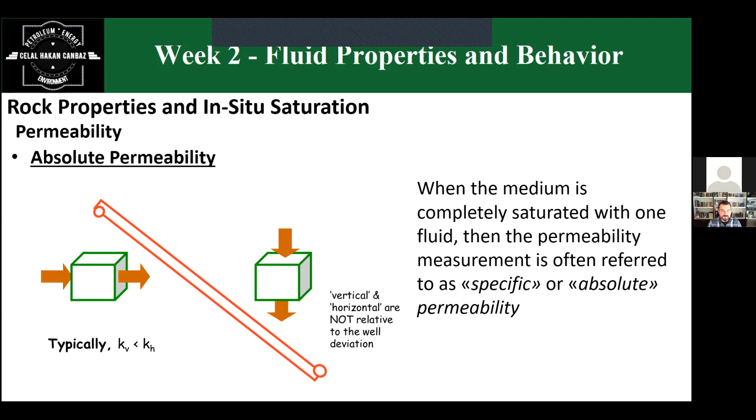Now, fluid saturation. The saturation of the fluid is the fraction of the pore volume occupied by that fluid—the volume of the fluid divided by the pore volume. So out of the total pore volume, what percentage, as a fraction, is occupied by that fluid? To know this, you have to use the saturation value.

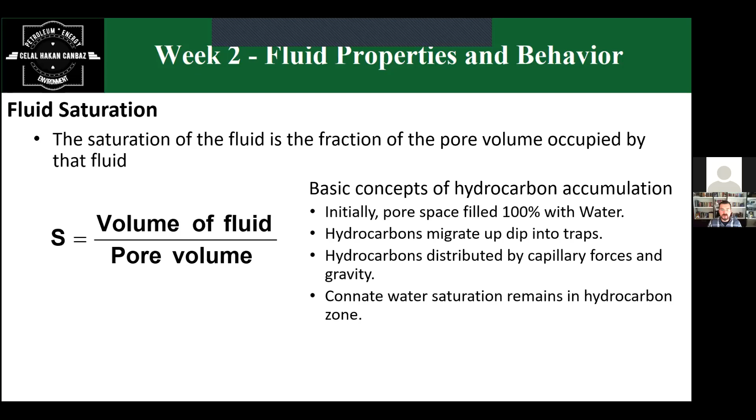How do we determine these fluid saturations? We use core analysis, as I mentioned—one of the main sources. With in situ taken samples, it will be much healthier, with lower uncertainty, and you can get the results. Capillary pressure measurements can also be performed, and of course logs are another choice for estimating this. Electric open hole logs are used for that.

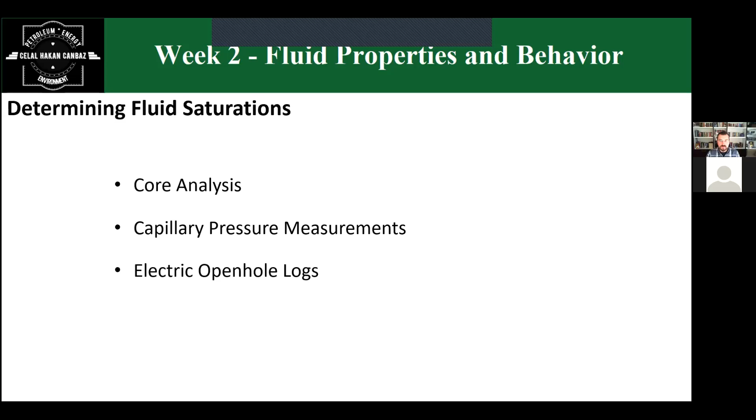For the relative permeability term, before describing relative permeability, we have to describe effective permeability. If the rock pore spaces contain more than one fluid—instead of one fluid, you have two or three fluids, gas, water, oil—

then the permeability to a particular fluid is called effective permeability—the measure of the fluid conductance capacity of a porous medium to a particular fluid when the medium is saturated with more than one fluid.

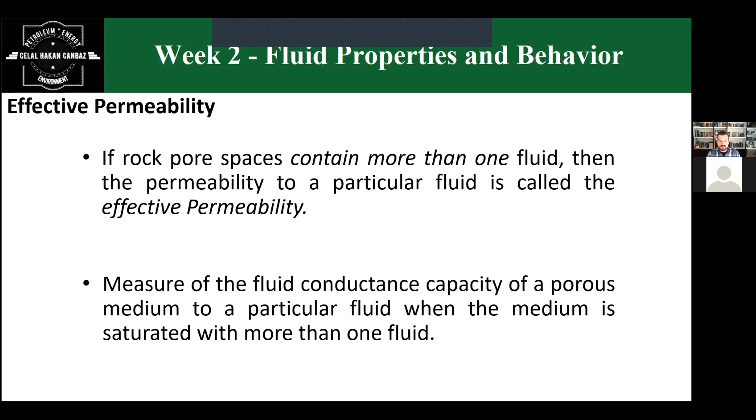When the medium is completely saturated with one fluid, then the permeability measurement is often referred to as specific or absolute permeability.

So what about relative permeability? It is defined as the ratio of the effective permeability to a fluid at a given saturation to the effective permeability to that fluid at 100% saturation level. In other terms, for oil, gas and water, the relative permeabilities are the effective permeabilities divided by the permeability value. So when we put these on a plot, the relative permeability plot—

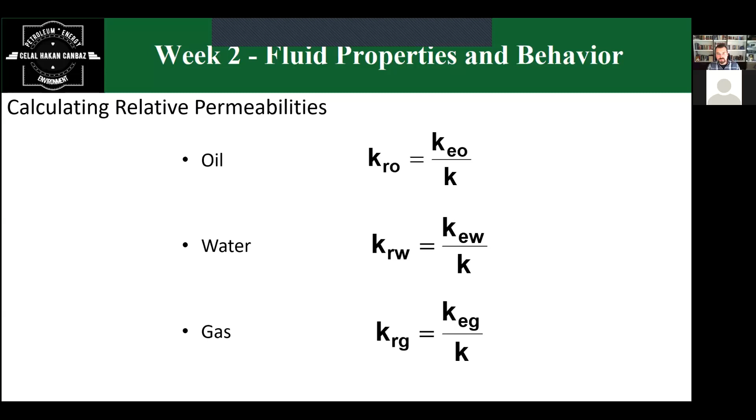here we can say that if we have one fluid in the medium, the permeability has to reach your Kr, relative permeability, to 1. In core analysis, this can be done—not exactly 1, but 0.99 can be reachable.

If oil is moving through rock with irreducible water saturation, then your permeability maximum can reach to about 0.8 or 0.78. If water is moving through rock with irreducible oil saturation, then your water saturation level will be somewhere here. This is a scenario where both oil and water are present, and if the phase is more than one, your permeability seems reduced.

This plot is also used to describe the wettability—we will talk about this one later.

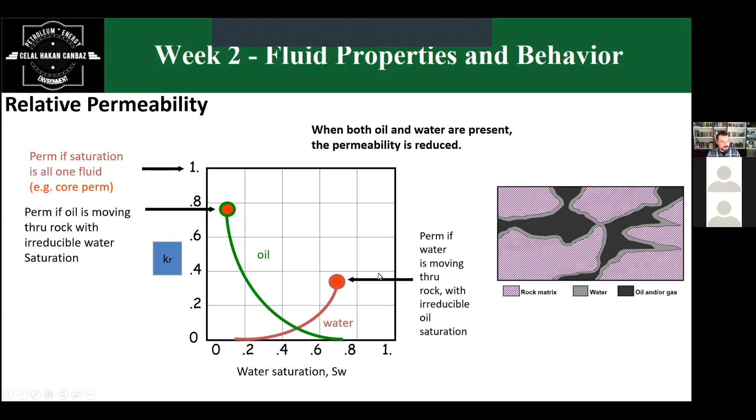Depending on the saturation, the permeability to oil and to water are each lower than 1. Thus, the effect of having both fluids present is to lower the permeability, even the sum of the two is not unity. So when a well starts producing water instead of just oil, if you start to produce water as well, your liquid production is likely to be reduced. So phase change, adding another phase, totally has an effect on your values of permeability.

So what about wettability? These terms are strongly dependent on each other. Wettability can be described as a tendency of a fluid to spread on a surface when that fluid and the surface also are in contact with another immiscible fluid. Two fluids are not miscible with each other; they both have to be in contact with your rock surface to have a comparison. The second fluid can be air, a gas phase, but mostly we are using it for oil and water.

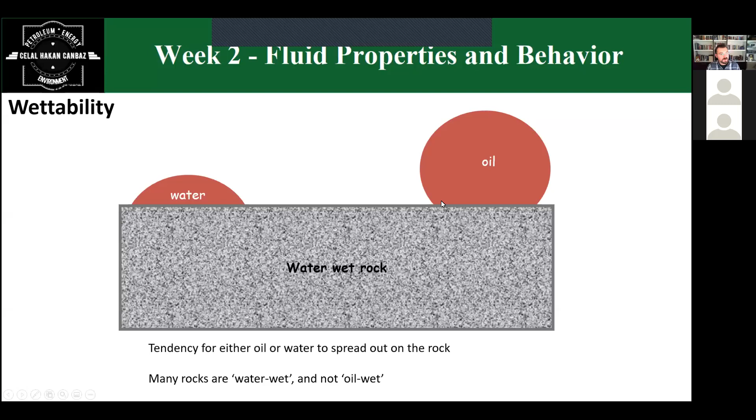You can perform some wettability analysis like goniometric measurements, or some core analysis like USBM and Amott method. And there is another alternative method that we developed also at Istanbul Technical University, continued in Abu Dhabi at the Petroleum Institute - we developed this alternative method called the rising core method. It gives you also an idea regarding your rock behavior with the existing oil and water phase.

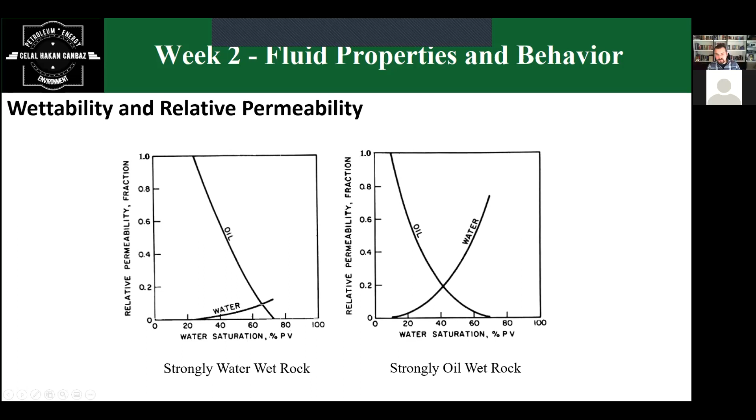So the capillary pressure - let's describe the capillary pressure as well. Here you have a capillary tube, with your liquid phase and your gas phase - let's say liquid phase and gas phase, or oil and water. Here is oil and water. Say your water phase makes an angle like this, we call this theta.

It has a radius, it has a height of your column - that's one way of description. The second way of description: your interfacial tension of your water and oil phase, and your cos theta divided by R, your radius. This gives you the capillary pressure.

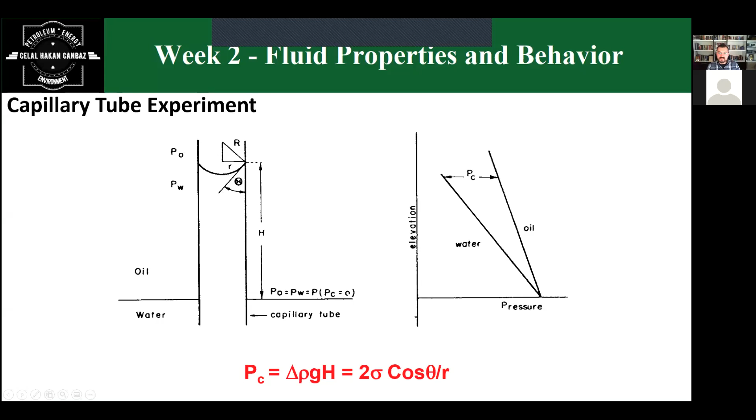Let's describe this to make it a little bit more understandable. For example, if you place a capillary tube into a dish of water, the water will climb up the tube some distance. The force which causes this to happen is capillary force. At the top of the fluid column, the shape of the fluid is cupped, indicating that the air pressure is higher than the water pressure. So in the previous example, oil pressure is higher than the water pressure. The difference in the air and water pressure at the curved interface is called the capillary pressure.

If capillary tubes of different diameters are placed into the dish, the water will climb the highest in the smaller tube, and the curvature will be greatest, and the capillary pressure will be highest as well.

So in a rock, when we talk about a rock surface in contact with two fluids, it is originally saturated with water. As oil begins to rise upwards, at the interface of oil and water in the pore space, the oil pressure is higher than the water pressure by the capillary pressure.

If this oil-water interface is high above the free water level that we talked about last week, which is the level of water in the dish, the capillary pressure will be higher. So what does this mean? This means oil moves more easily than water through a water-wet rock, since it follows the big pores and permeable paths.

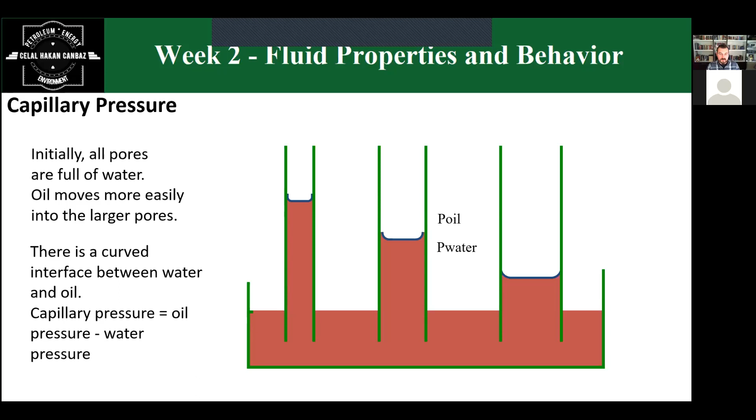Another term, the capillary pressure, is the non-wetting phase pressure minus the pressure in the wetting phase. The pressure difference between the non-wetting phase and the wetting phase.

So it's described by the Young-Laplace equation, and here you can see the liquid surface tension. We are assuming here it's not oil, but liquid with air contact. Your capillary pressure term is here, and your radius, R1 and R2, are the principal radii of curvature on the interface. The difference of these R's gives you the capillary pressure term.

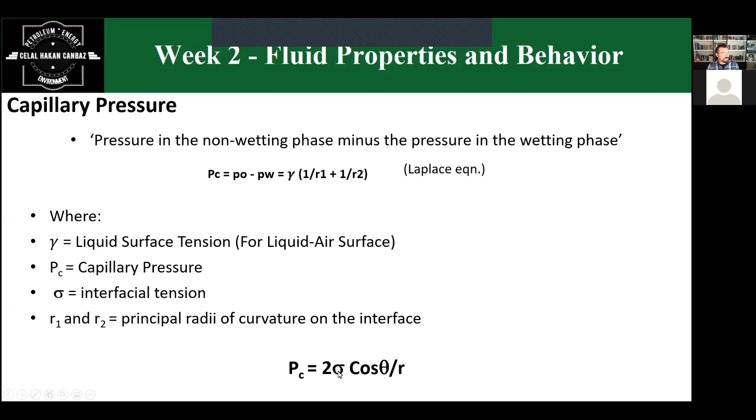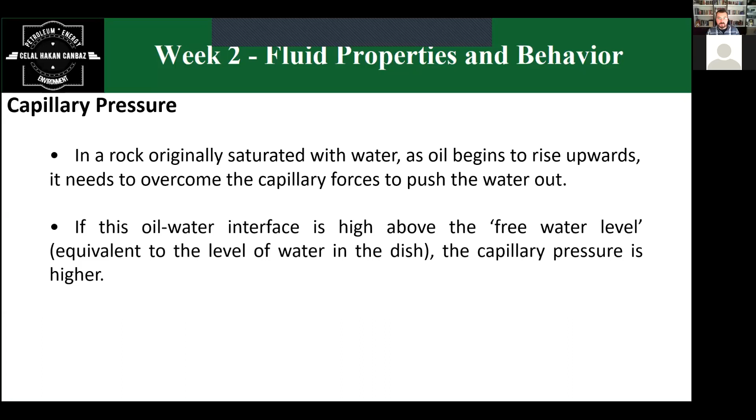So we tried to describe the main terms, and now let's go to the 5 fluid types and fluid behaviors. What are these fluids that we are dealing with in reservoir and wellbore, in production, in the oil and gas industry? So we have black oil first of all, the easiest part actually. We have certain correlations to describe black oils, and things are easy for black oils.

Black oil, volatile oil, actually we can say retrograde gas, we can say wet gas and dry gas from oil content. If we put it in order from oil content, we can say black oil, volatile oil, retrograde gas, wet gas, and dry gas.

So let's start with the assumption that we have a single hydrocarbon compound. If I have a single hydrocarbon compound, my phase envelope will be like in this figure. So your vapor pressure curve will be a line up to your critical point, and the upper part, above this point, will be liquid totally.

Then following the critical point at a certain temperature, when the temperature increases, it will be gas phase directly, and the part below this vapor pressure curve will also be described as gas phase. This is a single hydrocarbon compound, let's say methane, for example. But in nature, it's not like this.

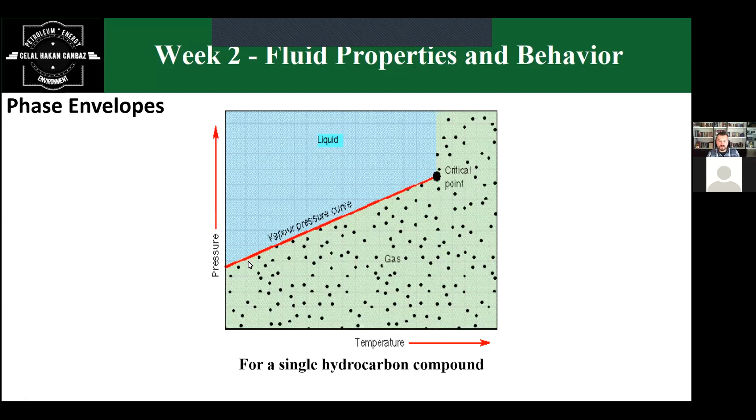So you have a bubble point pressure curve, not a line anymore, it will be a curve, your bubble point pressure curve up to your critical point. And then following the critical point, your dew point curve starts, because it will pass through gas phase directly. Above this bubble point curve will be described as liquid. Again, at a certain temperature above your critical point, it will be described as gas phase, and following the lower part of your dew point curve will also be described as gas phase.

So inside this phase envelope, your liquid level will increase from 0 through to 100%. And these curves, these liquid percentage curves, also vary according to your hydrocarbon content directly. So in this example, it's a good case, a typical case, but a good case.

The A point here gives you your reservoir pressure and temperature. So the B point, for example, we can describe this as your wellhead pressure and temperature. And C, separator conditions. So what happens here in this scenario?

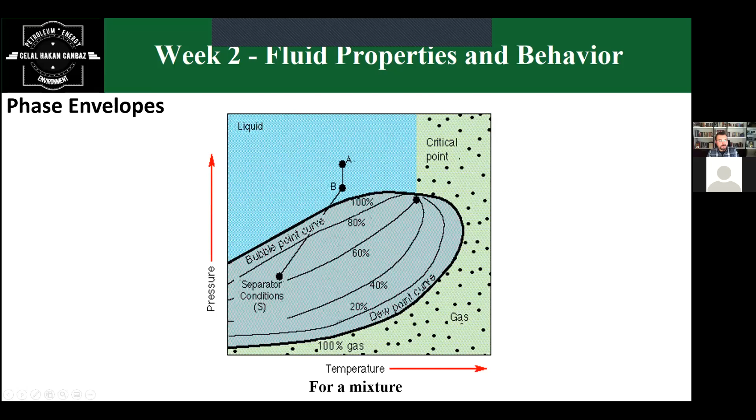So let's describe - yeah, this was the typical phase diagram we set in the previous example. This is similar to that scenario. This is a black oil sample. So in a black oil, you have your bubble point line. In all cases, your reservoir pressure and temperature will indicate one phase flow.

In some conditions, when it reaches the wellhead, you can pass your bubble point line and start to produce with two phase. If you are in two phase, then you will go for reservoir sampling. If you are in one phase, you will go for wellhead sampling directly. Of course, your liquid level will be lower when your pressure is lower.

So because of that, when it comes to the surface, it will be lower and lower. This will be your separator conditions - I think there is a mistake here, this will be your separator conditions, I think it can be somewhere in here. And when it comes from the separator, what happens? It separates your free gas and your oil. You will take it to the stock tank, right?

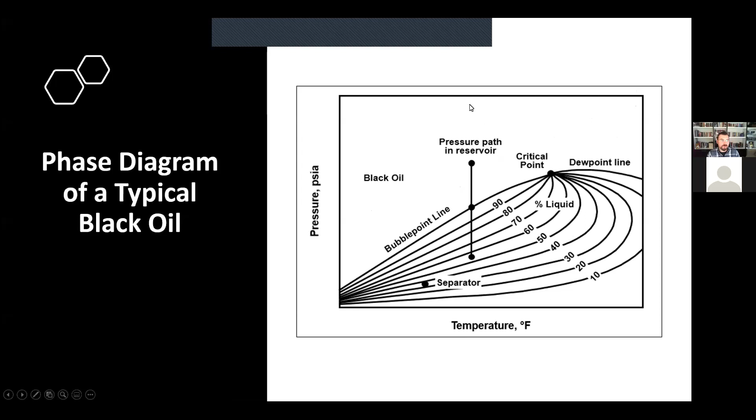Of course, what happens in most cases, when you come to the wellhead from your reservoir - in your reservoir you can be in single phase, but when it comes to the wellhead, it will probably be two phase flow. So you have to consider this one with a few amount of gas, but two phase.

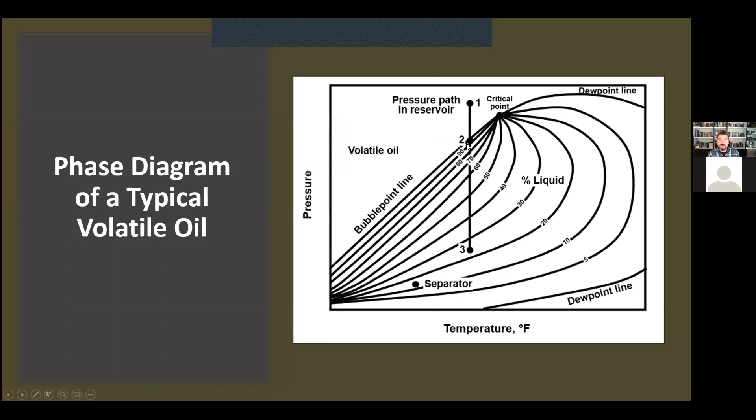So what about wet gas? Wet gas is a condition which is between the dry gas and the retrograde gas.

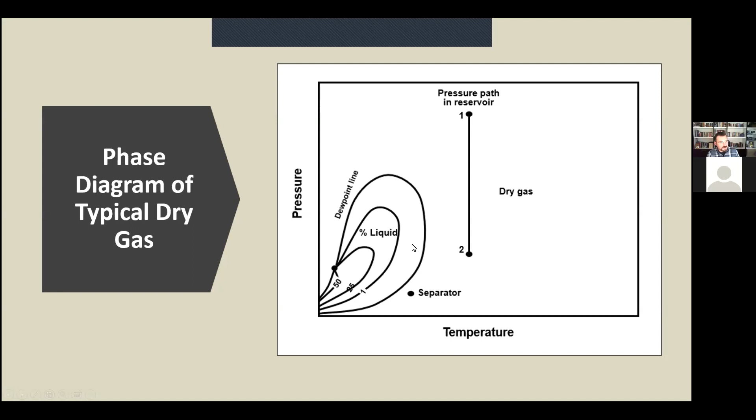So your phase envelope, when you compare it with the dry gas, it was very low. When you compare it with that, it's still low, but compared with dry gas, bigger, right? Bigger diagram you can see.

So you start to see your bubble point line. Your bubble point line is very low in here. Of course, the bubble point line is much more compared with that.

But in most cases, your reservoir pressure and temperature is still in gas phase. And when it comes to the wellhead, you still stay in gas phase, and at separator conditions, you will see some liquids. In wet gas, you will see some liquids in separator conditions, a few amount of liquids, but there will be some liquids, so separation is needed.

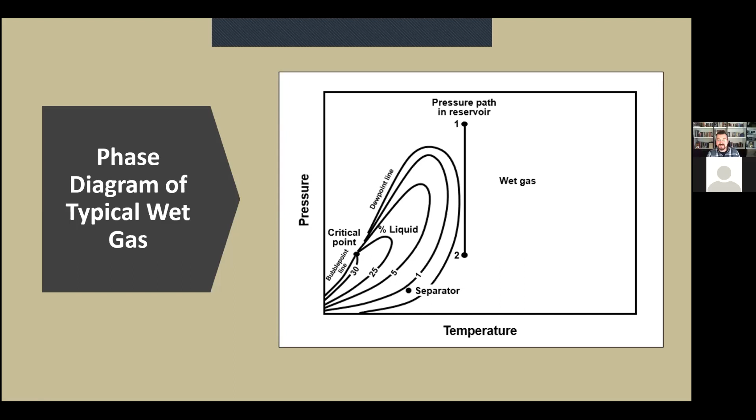You cannot send it directly to storage. So the retrograde is between volatile oil and wet gas. You can understand this from the envelope as well.

So three gases, what are the differences we said? For dry gas, gas at surface is same as gas in reservoir, totally. So where can I take my samples? I can take it from the separator, from the wellhead, doesn't matter, from the reservoir, but cost-wise, what is the best one? Separator. The easiest and the cheapest. You will take it from separator directly, okay?

Wet gas: recombined surface gas and condensate represents gas in the reservoir. Condensate is produced, of course. For the retrograde gas, recombined surface gas and condensate represents the gas in the reservoir, but not the total reservoir fluid. Very few amount of liquid you can see in retrograde gas in the reservoir. When it comes through to your wellhead, your gas phase will be the dominated one, and the liquid will be a very few amount.

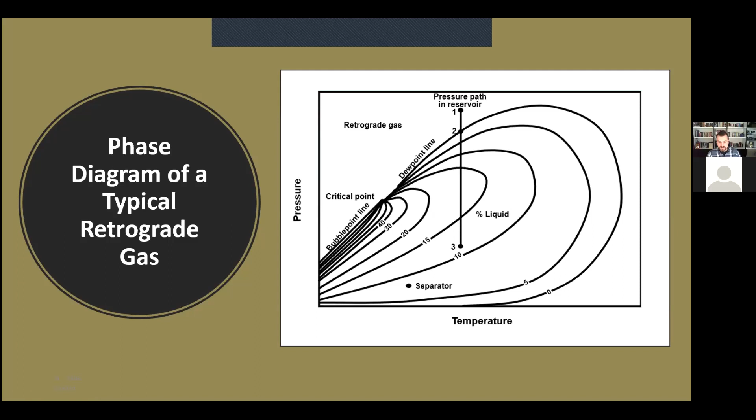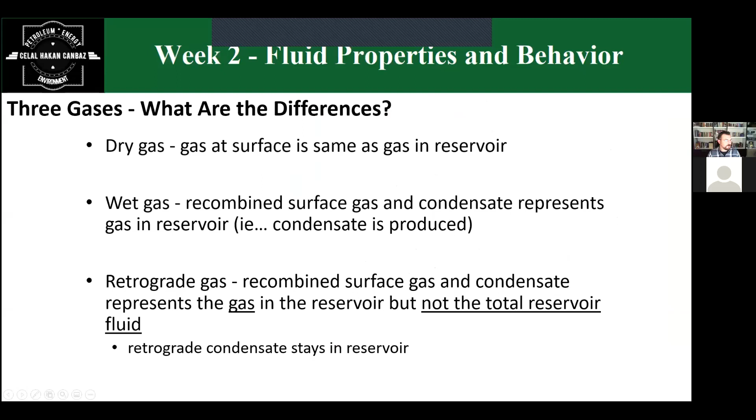I wanted to put this slide as well to see all the 5 reservoir fluids in one picture. So black oil, we said typical behavior. Volatile oil will have more phase envelope. Retrograde gas phase envelope will be lower, but it starts to pass to gas phase. We can see liquid level will be lower.

And when it comes to wet gas, your phase diagram will be smaller, and your bubble point pressure curve will be very low, and in the gas phase it will be much more lower. And of course, the phase diagram is lower compared to wet gas.

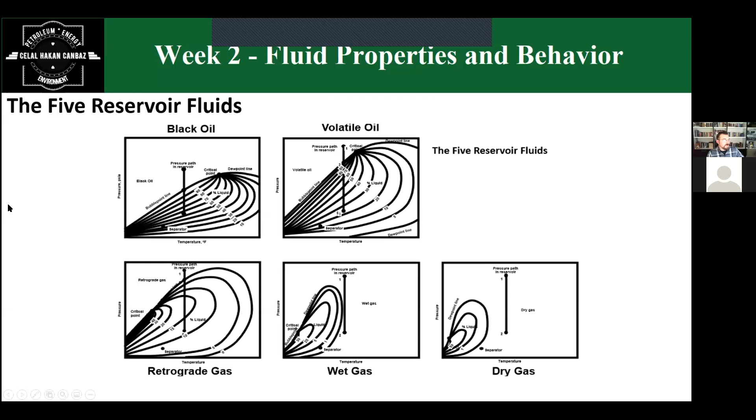So let's make some points regarding field identification. For example, for black oil, volatile, retrograde, wet, and dry gas, for initial producing gas oil ratio (GOR) values, for black oil it will be lower than 1,750.

For example, I was working in a black oil field called Rumaila in Iraq. We were reaching a maximum of 1,500. It's a typical black oil reservoir with around 1,200 wells, all producing similarly.

So all correlations are directly applicable for this type of reservoir, it's the easy one. When it comes to volatile oil, GOR will be between 1,750 to 3,200. If it's more than 3,200, you classify it as retrograde gas. If more than 15,000, wet gas. Dry gas is more than 100,000.

So the liquid gravities: for black oil it will be lower than 45. For volatile oil, higher than 40. Retrograde, higher than 40 again. For wet gas, you can get results up to 70. And in dry gas, you have no liquid, of course.

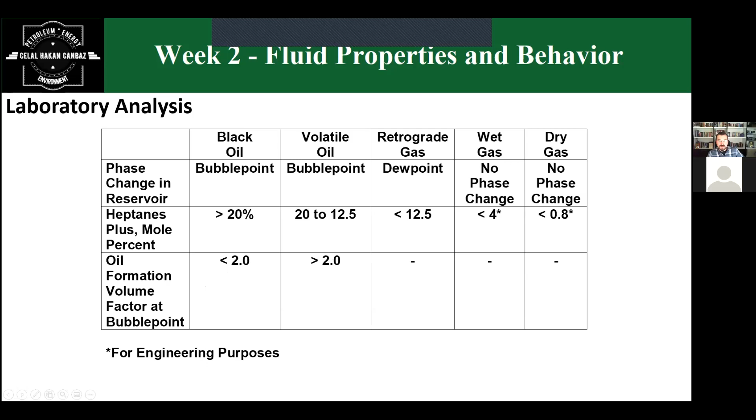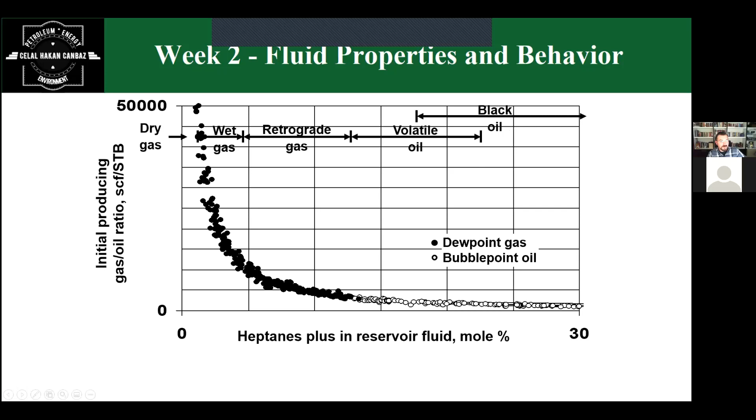So let's talk about the production trends for these 5 fluid types — primary production trends for the GORs and for the API gravities, for 5 different fluid types.

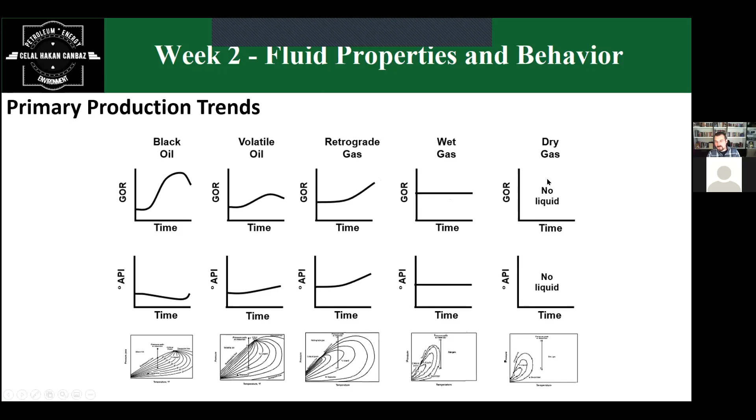For dry gas, you don't have any liquid to compare by time.

So for a single component again, let's talk about the pressure and volume behavior in a PVT cell. I have a single component, I took my sample, put it to laboratory, and now I am comparing the pressure and volume changes at a certain temperature.

If it is in the first one, number one, you are seeing all in liquid phase - we have an oil, all in liquid phase. The pressure starts to decrease by the machine, the piston comes to the backside, and the first gas bubble is seen - we describe this pressure as bubble point pressure.

We continue to lower the pressure using the piston, and it reaches the dew point - this is the last drop of liquid. From this point, there will not be any liquid more. So I continue to move the piston, changing the volume and decreasing the pressure, until I reach the fourth part, where I am totally in gas phase, starting from the third part through to the fourth.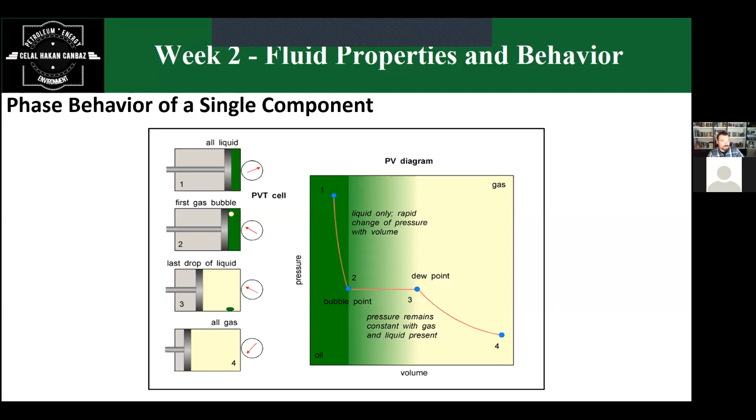I already mentioned the separator conditions - your pressure and temperature decrease. When your pressure and temperature decrease, your point in the wellbore will move to somewhere like this, because both are decreasing. So it will be volatile - volatile will be like this, then retrograde, then wet gas.

Wet gas is very important here because the phase is changing. From gas phase, when it comes to separator conditions, in most cases you are passing to two phase. So if you are producing wet gas, you have to be very careful and use a very good separator - the quality of your separator is crucial.

And when it comes to dry gas, you are already in gas phase, so it's not harmful, there is no problem. You can take your sample anywhere you want - you will choose the most cost-effective one.

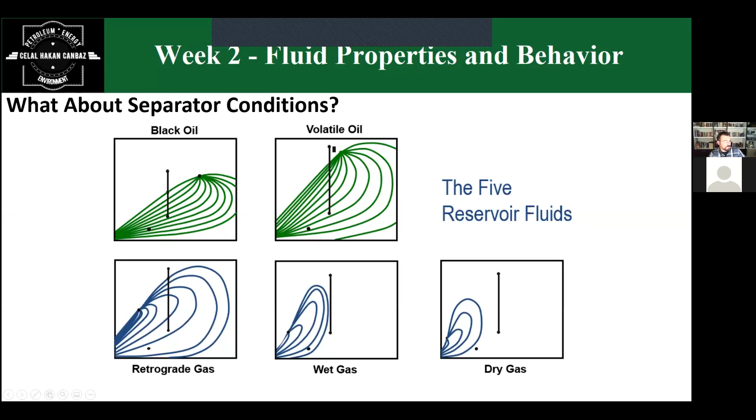Let me open all since we are online now. So, oil change during production - during production there will be a mass losage. The oil phase will lose its mass as gas comes out of solution on its trip to the surface. You start from your reservoir and come to your wellhead, and with the decrease of temperature and pressure, solution gas will expand and pass to gas phase.

When it comes, you reach your wellhead. From your wellhead, when you're going with your pipes through to the separators, again there will be some pressure and temperature change. With this temperature change, some more parts will pass from solution gas inside your oil through to the gas phase directly.

So because of that, next week we will talk about this in multi-phase flow metering. What happens? The industry solved this problem. When you are going from your wellhead through to your separator, it takes some time and some length of pipe. So multi-phase flow meters in line conditions enable you to take samples and measurements without separating these three phases. It's in your line, taking samples directly from your line. We will talk about this next week.

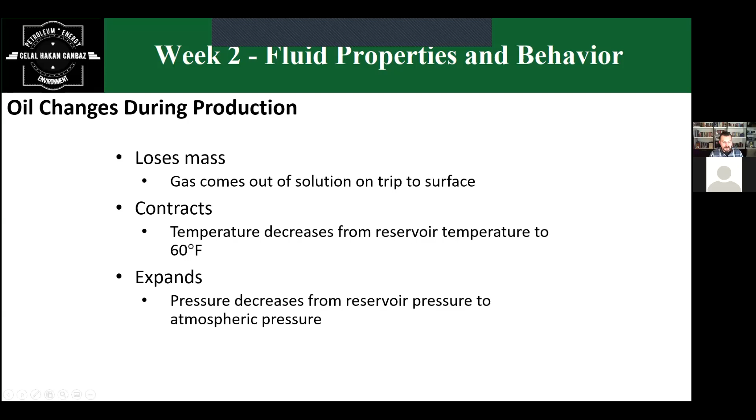So, fluid physical behavior: oil in the absence of gas in solution is called dead oil. The physical properties of dead oil are a function of the API gravity of the oil, pressure, and temperature. The API gravity of oil is defined as 141.5 divided by specific gravity at 60 Fahrenheit.

I saw some field engineers taking this in separator conditions, not stock tank conditions. This is actually one of the crucial points. Minus 131.5 - it's very clear, very easy.

API gravity classification - with gas in solution, oil properties also depend on gas solubility. Gas solubility is normally represented by RS. If you see RS, it means the gas which was inside your oil at a certain pressure and temperature comes out from the oil phase as gas phase.

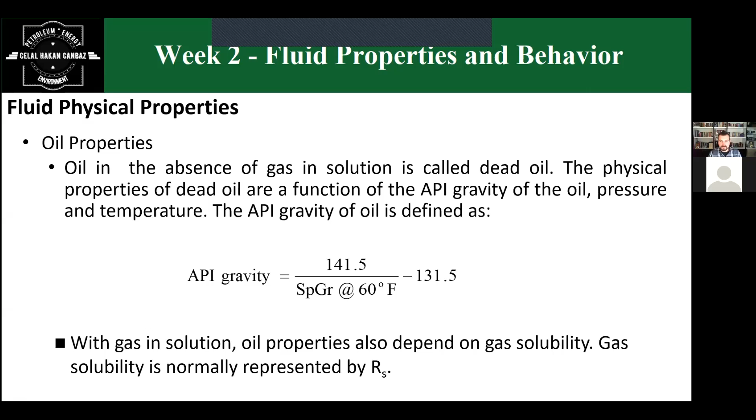So the gas solubility is defined as the volume of gas dissolved in 1 stock tank barrel of oil at a fixed pressure and temperature. In other words, it's a measure of your 1 barrel of reservoir oil - when it comes to surface, how much barrel of oil it represents. This is the classification of this ratio.

There are several correlations in the literature for gas solubility. For example, here you see the standing correlation, which is widely used, very useful and the easiest one. There are some others like Lasater and some more. Most softwares use this for black oils. This will be used for black oils; when it comes to volatile oils, it will show some error percentage, but for black oils it's very useful and can be used without taking any sample section.

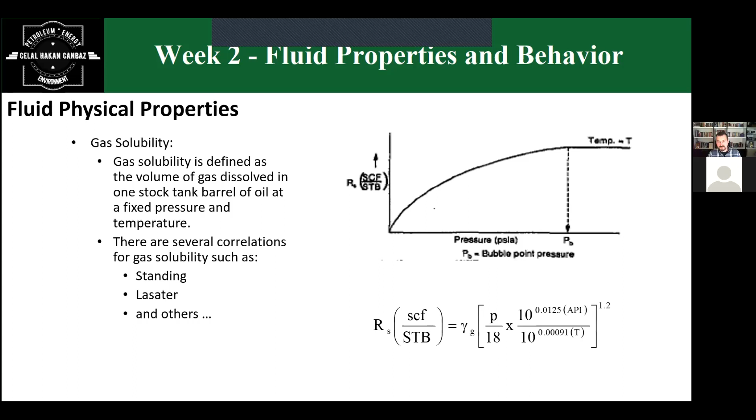Oil formation volume factor: volume of reservoir oil at reservoir condition required to produce 1 standard volume of stock tank oil. The unit is reservoir barrel per stock tank barrel - the ratio of reservoir barrel per stock tank barrel. The symbol is BO for oil, and BG for gas.

So we are seeing here these 4 stages directly. You have an oil phase, and in your wellbore somewhere - let's say this is 2000 meters - at 1000 meters it shows a flash. What do I mean? It passes to 2 phase. When it comes to surface, it's coming as 2 phase. We saw this in retrograde behavior.

So it comes to your wellhead as 2 phase, and of course you still have an oil phase, but this oil phase also has some gas in it - it could not come out because of the pressure and temperature. When it comes to your separator, some part of this joins the free gas volume, and then from the separator, your liquid phase comes to your stock tank, and from your stock tank, some part comes out to gas phase, and this will be your dead oil.

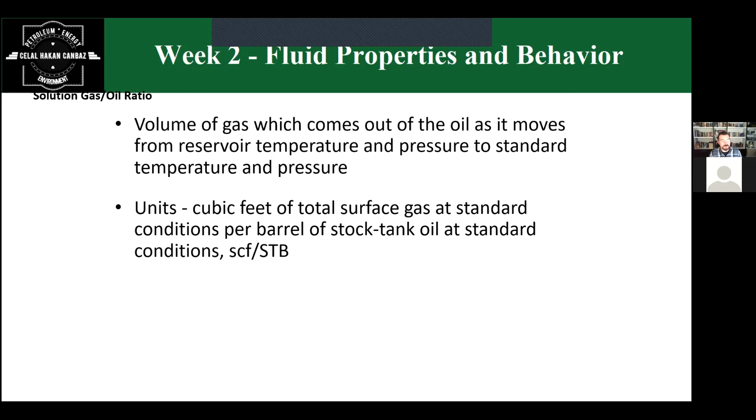So the typical behavior for the solution gas oil ratio is also nearly the same up to your bubble point, but the change of slope will be earlier compared to the previous one. When it comes to your bubble point pressure, it will remain constant - we can say a very slight decrease, but it remains constant.

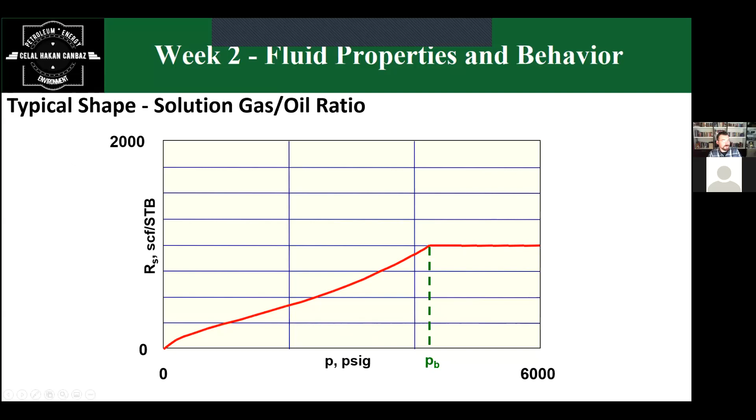So if your reservoir pressure is higher than your oil bubble point pressure - this was the first case we already described. This condition means your reservoir pressure is higher than your oil bubble point pressure. You are in one phase in your reservoir and coming to two phase along your wellbore, or in your wellhead it can happen as well.

But if your reservoir pressure is lower than your oil bubble point pressure, then what happens? You have free gas - free gas in your reservoir too. Not only existing as a solution at surface, you have free gas in your reservoir too. So in this case you have to calculate your Bg, gas formation volume factor, as well. Near your oil formation volume factor, you have to consider your gas formation volume factor too.

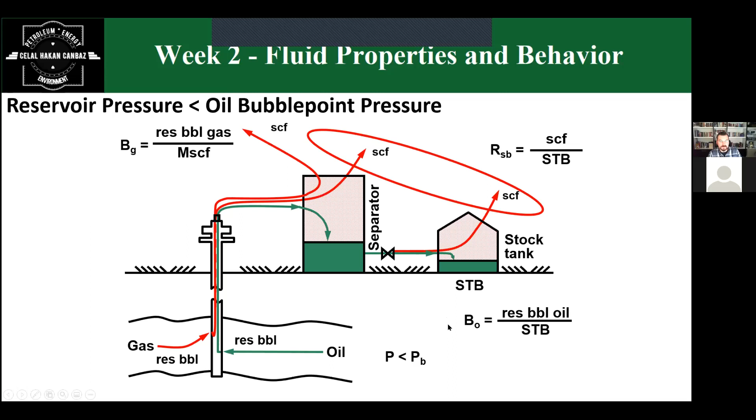This figure, we talked about last week as well - Bo, Bg, and Bw, or water formation volume factor, because water has solution gas in it, right? So solution gas in it passes to gas phase when it comes to surface as well. Not vapor - vapor is a different condition. So we have to consider all these values when making our calculations from reservoir through to the surface, through wellhead, through separator, and through to your stock tank.

So what about oil viscosity? This is another property of fluid which is very crucial. Viscosity is the resistance to flow exerted by a fluid. So large values of oil viscosity result in low flow rates, because the resistance increases and the movement of particles becomes slower and slower, so it will directly affect your production.

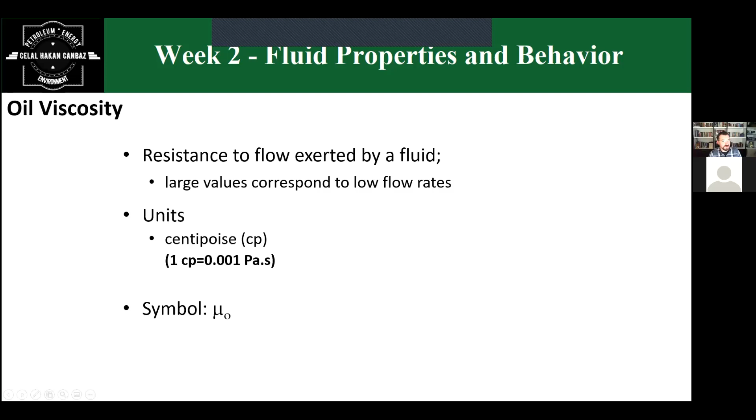So the unit of viscosity is centipoise - Pascal second can also be used - and the symbol is mu. For oil, it's given here. For example, it shows a quite high viscosity here.

What happens with the dependence of oil viscosity on pressure? Let's see. The typical behavior of viscosity with increasing pressure will be like this - the slope changes, showing an exponential decrease over time until it reaches your bubble point. When it reaches the bubble point, it directly changes behavior and starts to increase linearly, instead of showing the exponential decrease.

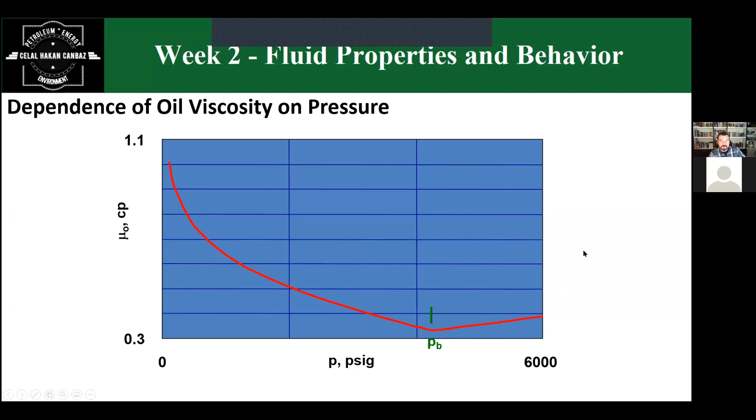So another thing is fluid compressibilities. In isothermal compressibility, the formula can be described as a function of the volume and the volumetric change with pressure. The unit is PSI to the minus 1, mostly taken in the oil industry.

For oil, it's between 5 to 20 times 10 to the minus 6 psi minus 1. For free gas, it's 200 to 1000. For water, it's 2 to 4 times 10 to the minus 6. For the rock, we can take 3 to 10 times 10 minus 6 psi. That's the pore compressibility, but it's rock compressibility.

For total compressibility calculations, in nature all these fluids can be seen inside a pore space. So what you do is take your oil compressibility times oil saturation, plus gas, plus water, and then add your pore compressibility. This gives you your total compressibility.

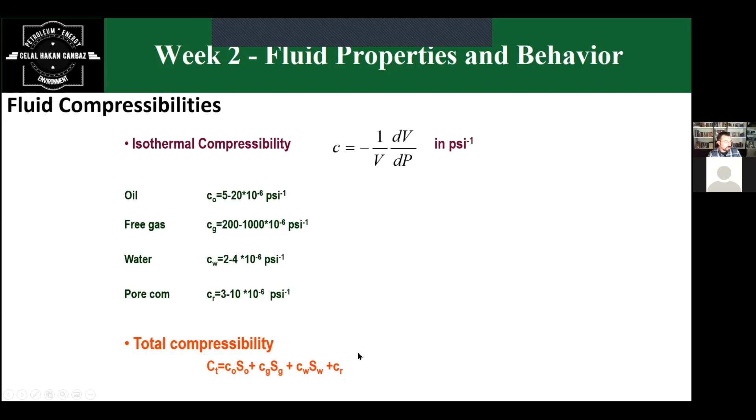So volumetric gas reservoirs. In this type of reservoir, the reservoir type is a gas reservoir with no aquifer.

The main source of reservoir energy is the expansion of the original reservoir gas. In this type of reservoir, expansion of reservoir rock and the original water are always present but often show minor sources of reservoir energy. The dominant mechanism is the reservoir gas drive.

Reservoir rock and fluid expansion can be important sources of reservoir energy for abnormally high pressure gas reservoirs. It shows different production characteristics compared with normal gas reservoirs.

So gas reservoir drive mechanisms are divided into two types. One, as I mentioned, is the volumetric reservoir, where the dominant phase is the gas phase, also called gas expansion drive. The second is the water drive, where you have an aquifer in the lower part that applies extra pressure.

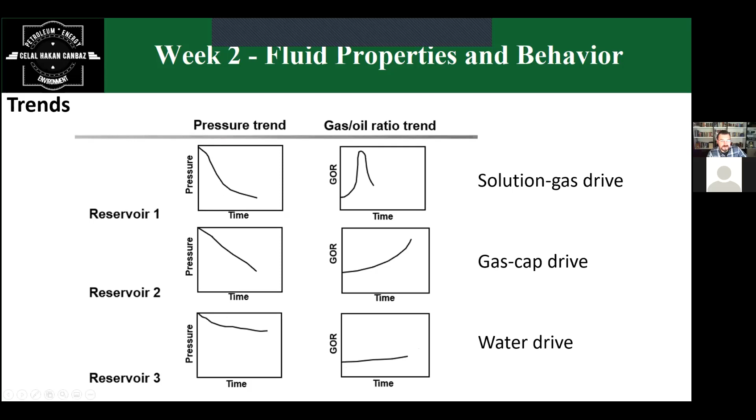What about the recovery factors of these different reservoir types? For solution gas drive, the recovery factor range is between 5% and 30%, averaging about 15%.

For gas cap drive, it's 15 to 50%, averagely taken as 30%. When you don't have any idea about the reservoir properties and want to input some values into your software, you can take the average value of 30.

For water drive, it's between 30 to 60%, averagely about 40%, because most reservoirs with water drive are close to 30-40%. As for gravity drainage drive, it has a very wide range.

It's between 16 to 85, and averagely we can take it as 50. We don't have any idea regarding its behavior. Using average values will increase your uncertainty and error percentage directly. This can be used in earlier times, when you don't have any idea in your exploration phase of your reservoir, but later on you have to correct this with your measurements and the data from your tests, your wireline tests as well.

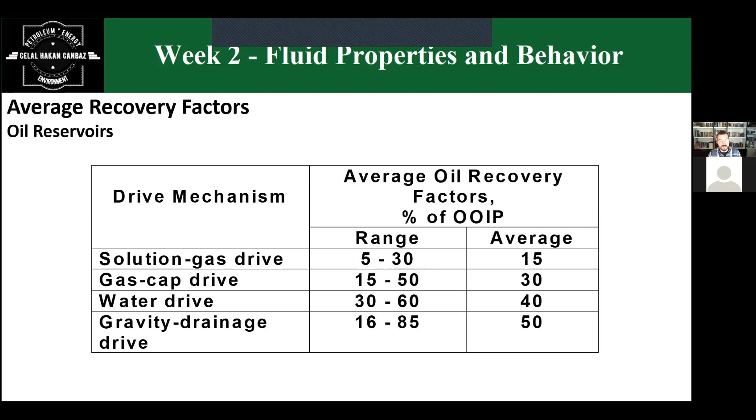So for volumetric gas reservoirs, the range for gas recovery factor is between 70% to 90%, and the average can be taken as 80. For water drive gas reservoirs, it's between 35 to 65%. Average can be taken as 50.

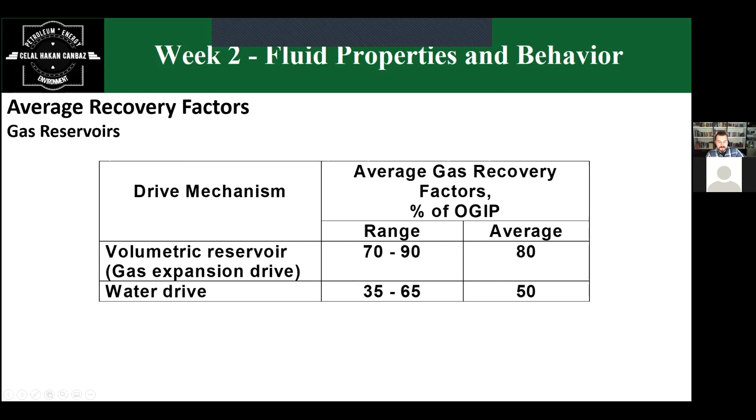So up to now, we described the oil reservoir: solution gas drive, gas cap drive, water drive, and gravity drainage. Gas reservoirs, volumetric gas reservoirs, and water drive reservoirs are described as well.

Now, what has to be the favorable properties for oil recovery? What do we want? What scenario is the best for us? Let's see this, for example.

If you are producing from a gas cap drive oil reservoir, your favorable oil properties have to be low oil density, so lighter oil with larger API values, right? This will result in higher recovery. Low oil viscosity is another one - less viscous oil means more movable oil, so you get higher recovery.

High oil bubble point pressure also leads to higher recovery. Why? Because if your bubble point pressure is higher, when it comes through your wellbore, it will stay in one phase and not pass to two phase. So it will increase the amount of oil produced, compared with the two phase case.

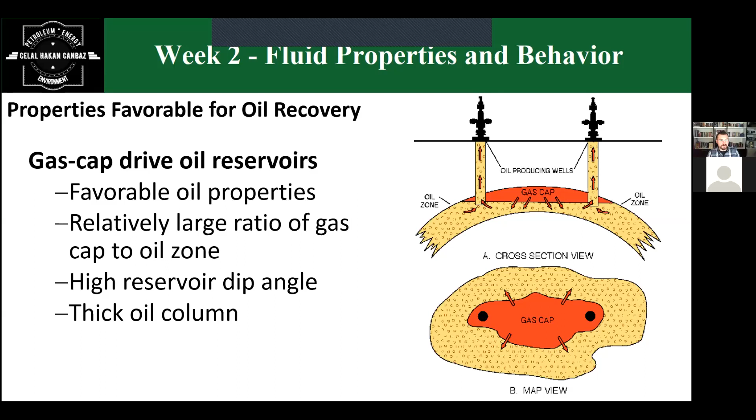We cannot reach this sweeping effect in solution gas drive reservoirs, so it's the reverse there - we don't want it, but here we definitely want it.

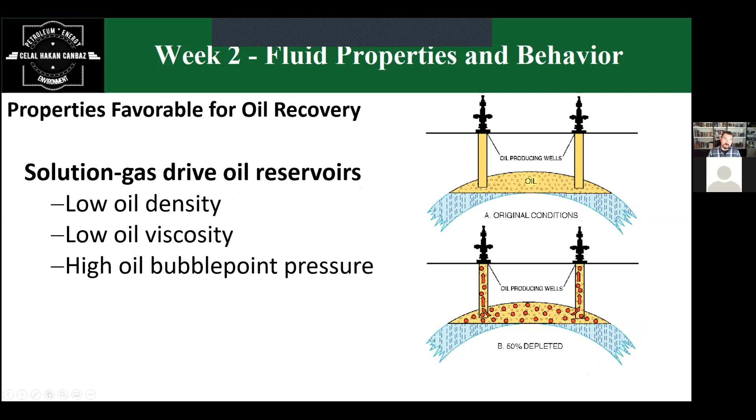So what about water drive oil reservoirs? A large aquifer is always something that we need, as it enables better pressure maintenance and support from beneath.

Better pressure maintenance and support result in higher recovery. Low viscosity of oil is something we want. Highly viscous oil will result in water fingering through to the reservoir, bypassing the oil phase and reaching the well. If it increases, it will become water coning, but in the beginning it results in water fingering. These are things we don't want. Lower oil viscosity means your oil is more movable, so it's a very good advantage.

Another factor is high relative oil permeability and low relative water permeability. In other words, your oil has to be more movable than your water. This will enable a very good sweeping effect, and then you will produce more and your recovery factor will increase.

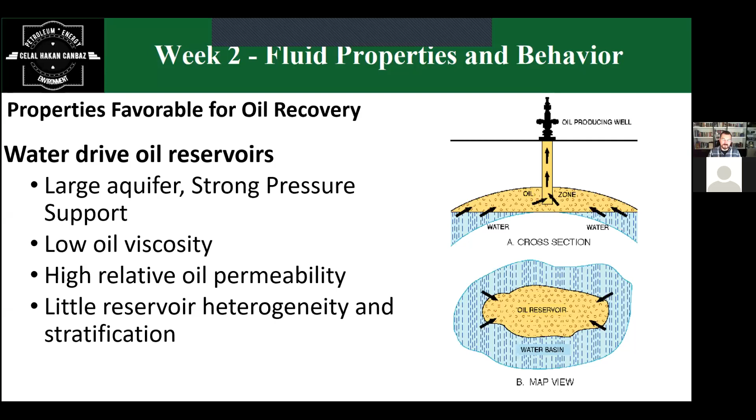Reservoir heterogeneity and stratification also have an effect. More heterogeneous reservoirs, with reservoir quality and permeability variations, can result in lower recovery. More layered reservoirs, with bypassing oil or non-swept layers, also result in lower recovery. These are things we don't want.

Combination reservoirs will have recovery characteristics similar to those of the dominant reservoir type, whether it's gas phase or oil phase dominant. According to that, it will shade toward those characteristics. So for combination drives, we can say it like this.

What about gravity drainage oil reservoirs? For gravity drainage, high reservoir dip angles, similar to gas cap drive oil reservoirs, result in favorable permeability distribution. If your permeability distribution is good and has lower uncertainties, that's what we want. High permeability along the dip can be reached as well, resulting in high recovery. Higher vertical permeability also results in higher recovery.

Another factor is large density difference between the segregating fluids - oil and gas, or water and oil. The large area of segregation is another factor. This results in large, high recoveries. Low oil viscosity and low withdrawal rates are other factors that result in higher oil recovery. These are the things we can say regarding combination drive and gravity drainage reservoirs.

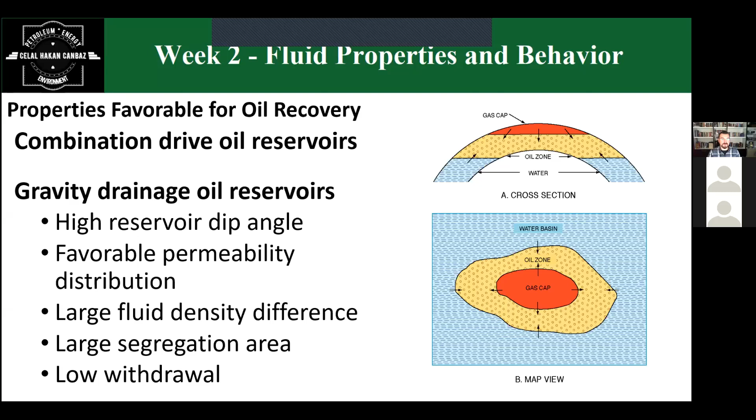The abandonment pressure for gas reservoirs can be reduced by lowering surface back pressure. Gas compression is often installed for this purpose. Favorable properties for water drive gas reservoirs are similar to those in water drive reservoirs: having large aquifers and a small degree of reservoir heterogeneity and stratification.

These are the things I can say for the second week, regarding fluid properties and behavior. This basic information will be very beneficial for the third and fourth week, covering the description of operational tools, how we use these tools, and their effectiveness. So for the first two weeks, I wanted to give these brief descriptions and the basics regarding reservoir geology, fluid properties, and behavior. Hope that you enjoyed this course.